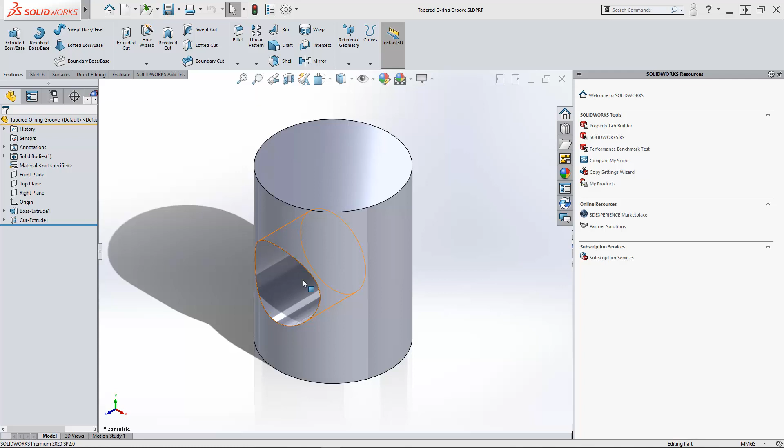I've been challenged to create a tapered groove in the wall of this cylinder. This is to fit an O-ring and keep it captured within that groove. So it's not just a straight slotted hole.

It needed to have a taper so we could press the O-ring through into it and hold it captive. Okay, so we've got a cylinder here with a diameter of 115 millimeters, and a bore that's 67 millimeter diameter. I need to protect the outside of that with an O-ring, because of where this thing will sit.

So first thing I'm going to do is use the swept cut command. The swept cut requires a profile sketch and a path sketch. Even though it asks for the profile first, it's always best to create the path and any guide curves before you even think about drawing your profile. So that's what we're going to do.

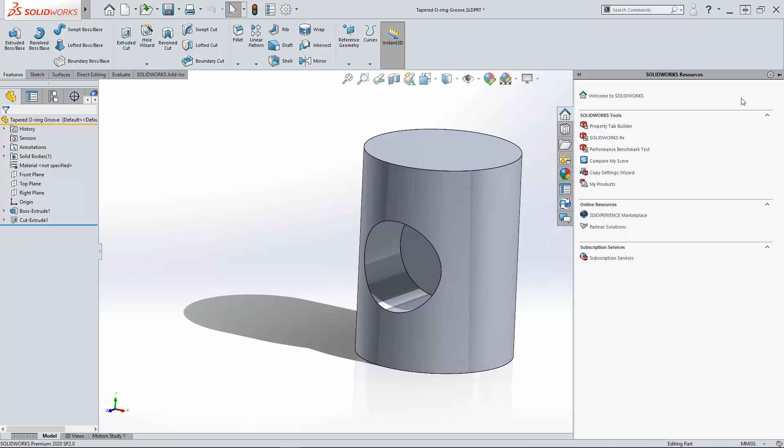So let's just clear that away. Here we have our parts. What we're going to start with is a sketch to help me define the shape of my profile path. I'm going to put a sketch on the front plane here, and draw an ellipse.

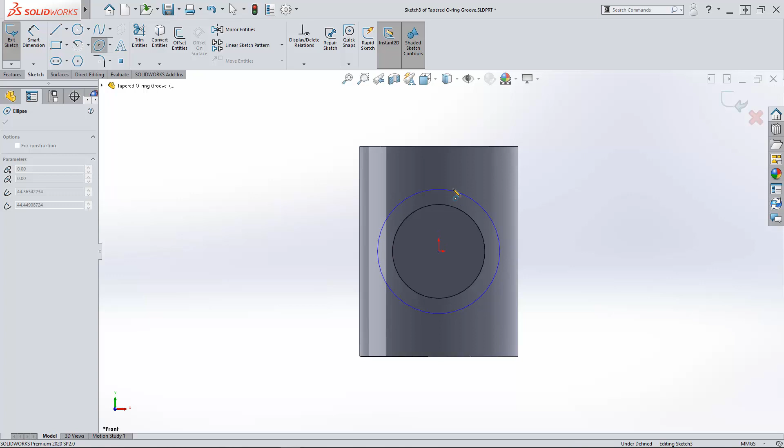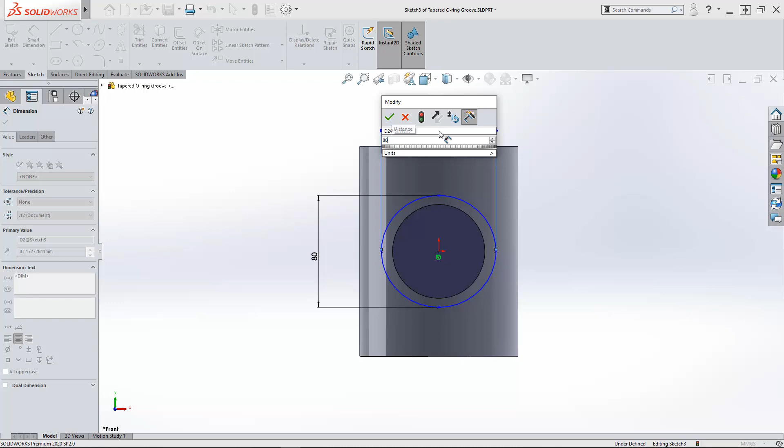Now, it is a circular hole, but I might want to control the overall size of this circle a little more. So I'm going to make it into an ellipse so I can control its width independently of its height. I'll make the height about 80 mil, and for the width, let's try 80 as well, which does make it a circle, but let's go with that.

Now the sketch is still underdefined, because I could still move these control vertices of the ellipse. So I'm going to select two of them and make them vertical to each other in this instance.

This is almost the path I want it to follow, but it needs to be scribed on this surface. Although there is a wrap command that's possible to use, for this we can get away with just using the split line command.

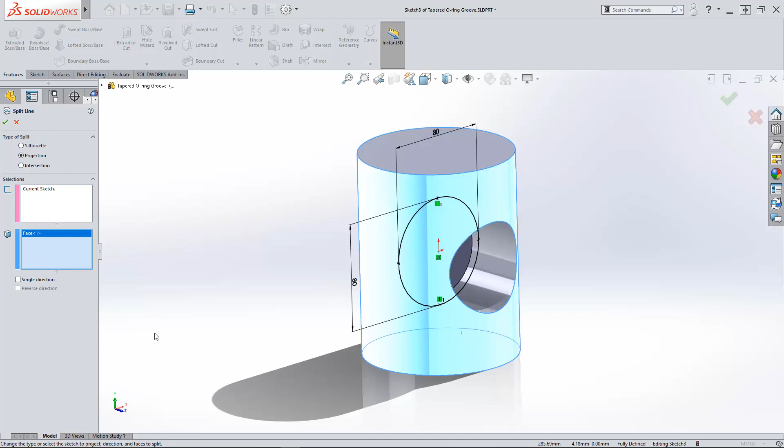So this will project that sketch onto this surface. I'm going to tick single direction so it only affects one side of the cylinder. Now we have a line scribed on the surface.

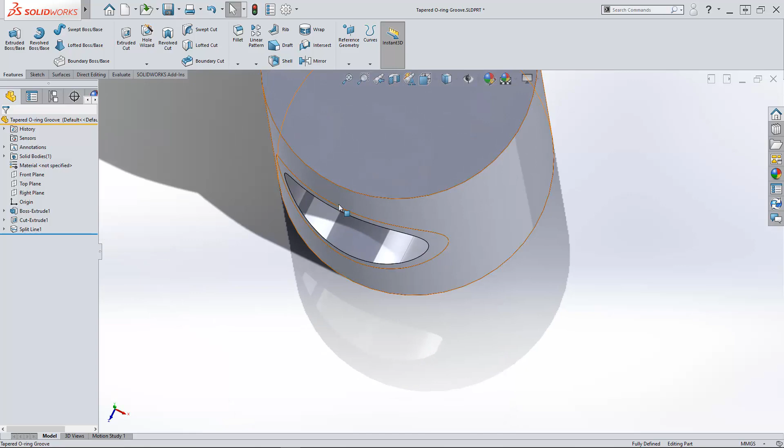That is going to be the center of the opening of my O-ring groove. We're going to create a sketch that's going to follow this path, but as we look around, it can start sort of horizontal, but it's not going to stay square because it has to follow and track round the cylinder.

So the only real way to control that is with guide curves. The ideal guide curve for me here would be something that was normal to the surface at that edge. We've got a command in SOLIDWORKS for that, on the surfaces toolbar.

It's this one here called ruled surface. We can select that and we get a whole bunch of options for what we can do here: taper it to a vector, perpendicular, swept, or we can go normal to surface. So that's what I'm going to do here.

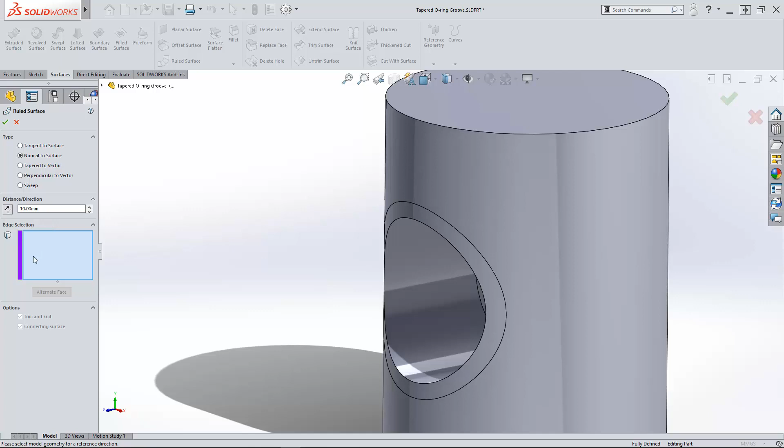The 10 mil distance isn't particularly important, but now what edge am I going to use? I'm going to use this edge here. Let's hit OK.

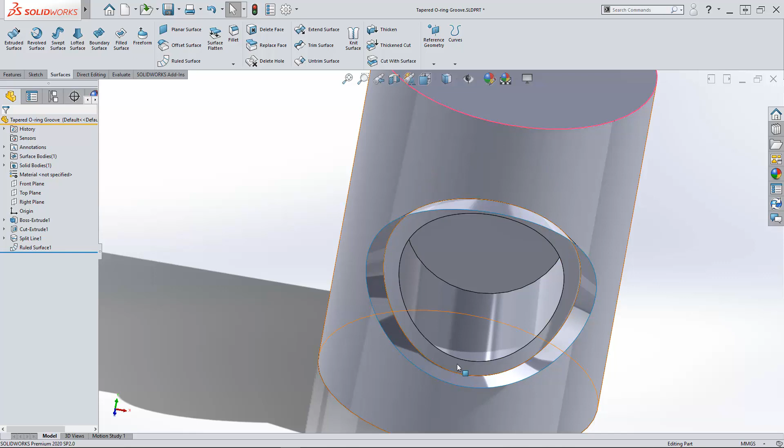Now, if I look at that from the right, we can see that that is going perfectly straight out from the wall of the cylinder at that point. And if I look from the top, we can also see it's going straight out normal to the wall at that point, and indeed it's doing it at all points around that edge. So this is going to be my guide - like the rails on which my sketch is going to sit for this swept cut.

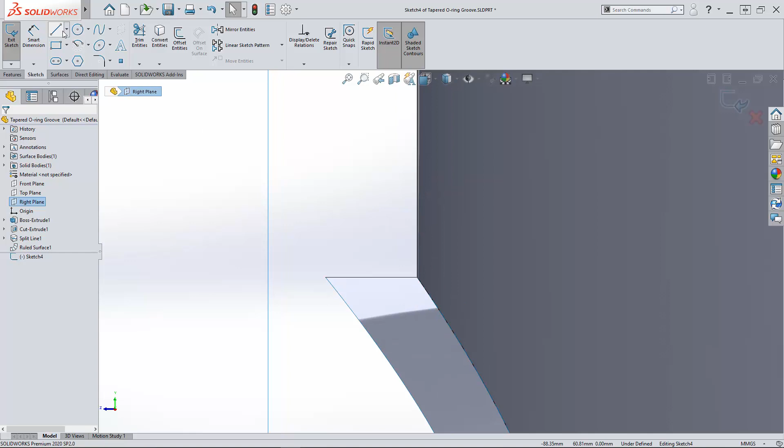So I'm going to draw the profile for my swept cut. We're going to sketch on the right plane, and it's going to be a triangle for this cut, a simple dovetail. So I'm going to draw some lines in here.

Now, purposefully, I am not going to try and make this horizontal or vertical. I'm just going to draw it out like this at an angle, for reasons that will become clear in a moment.

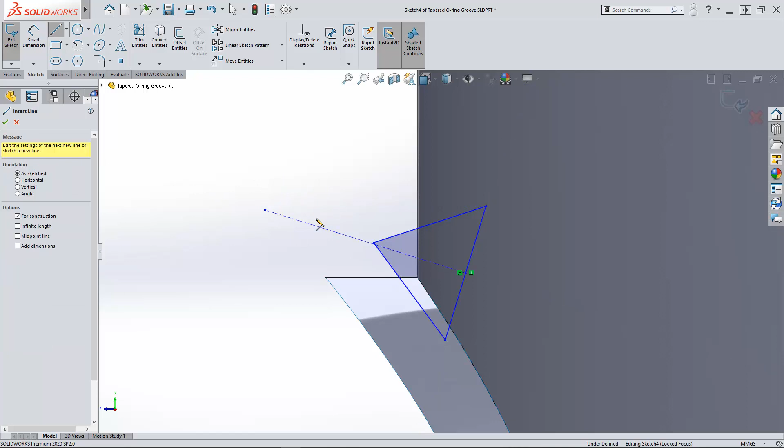So I'm going to draw a construction line out from here, and another one across here. Now, if I hover over that line, it will pick up the perpendicular relation, which is quite nice, and I'm keeping all these things perpendicular to each other. That is going to be the control I have on this particular sketch.

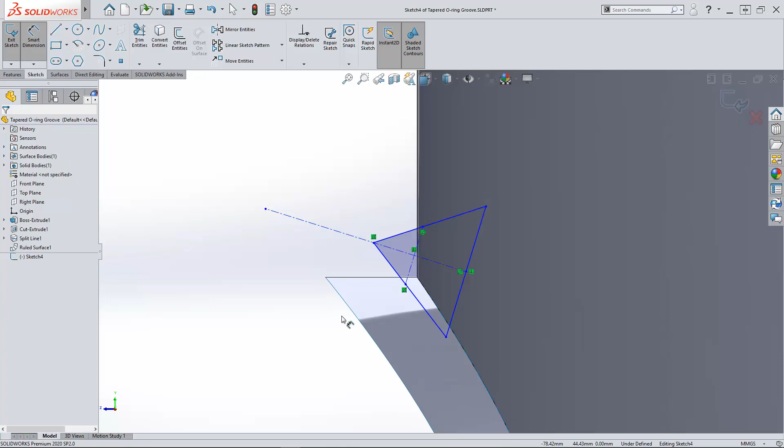So I'm going to select those two, make them coincident as well. I'm going to specify my opening width for this hole - let's say it's about 4.5 mil. The depth of this groove, I'm going to set at 4.5 as well.

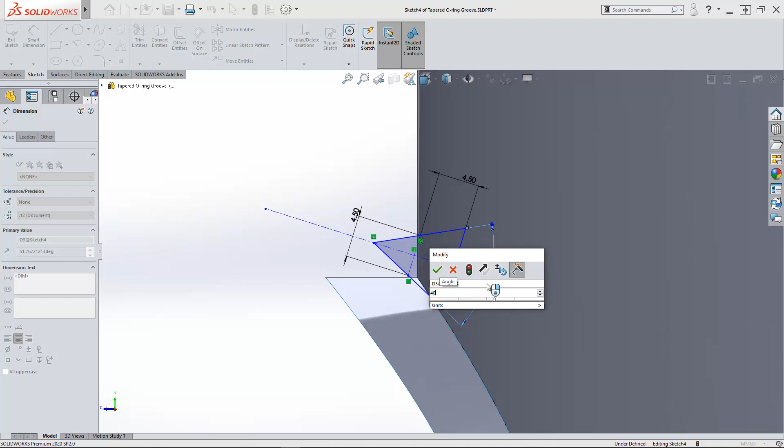And then for the angle, I'll have it fairly shallow. I don't want it too tight. I'm going to make it 40 degrees.

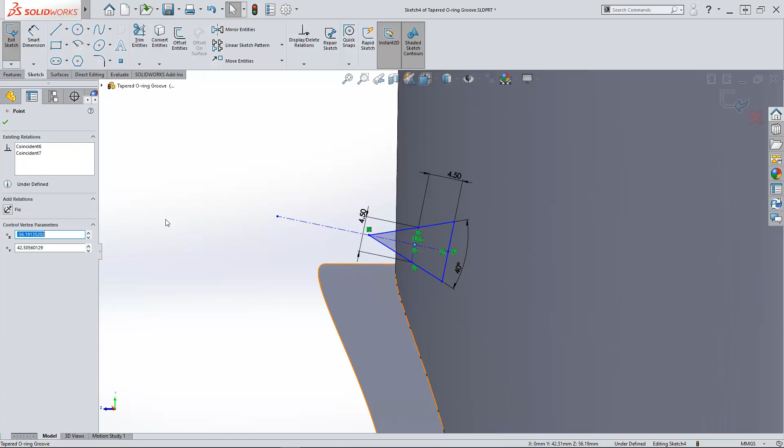Okay, so we have this sketch in here. Now there's one more thing I'm going to do. I'm going to put a little sketch point on this line, then take that line, hold down the control key so I can select the other one, and make them coincident with each other. So I've got a control vertex here, and one at the end of this line that I just extended out, and I didn't give it any sizes because I didn't need to at this point.

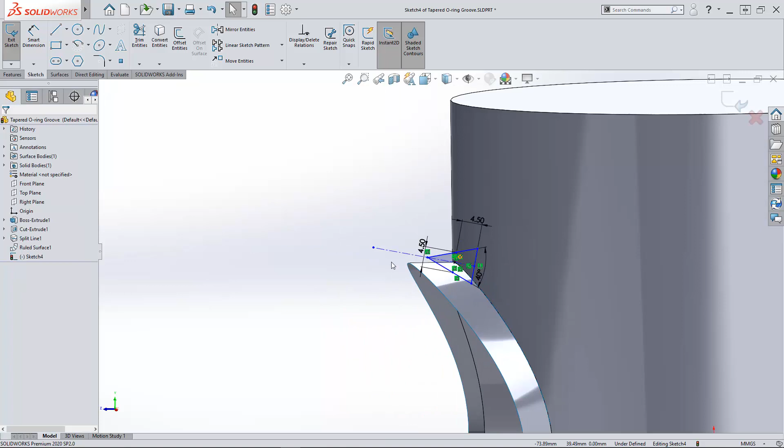Now I need to attach this onto this edge here. If you pick a 3D edge like I've done here, the option you get for a sketch relation is the pierce relation, so it will thread that edge through that point. Now it knows exactly where that part is. And if we take this one, we can do the same for the outer edge of this surface and pierce those two together, and suddenly my sketch is perfectly aligned.

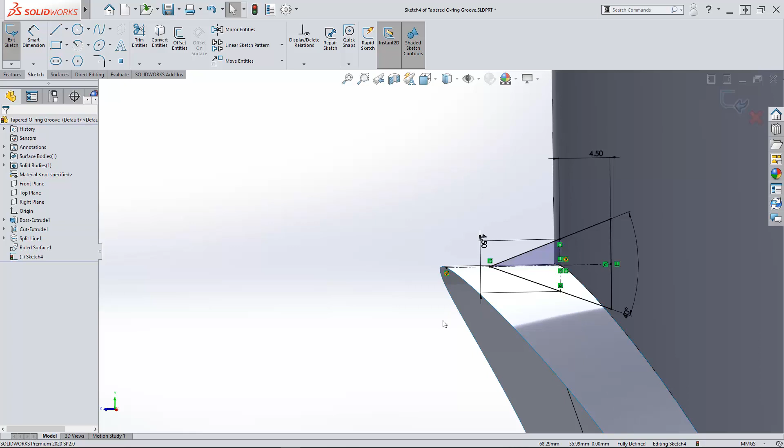Now it has got horizontal and vertical lines to it, but if I'd left them horizontal and vertical, as the sweep progressed around the profile, that horizontalness and verticalness might get defeated in the plan view, because what would be horizontal and vertical wouldn't be in line with my profile, this surface. So that's one of the reasons why we had to make sure we weren't using any vertical or horizontal sketch relations in this little feature here.

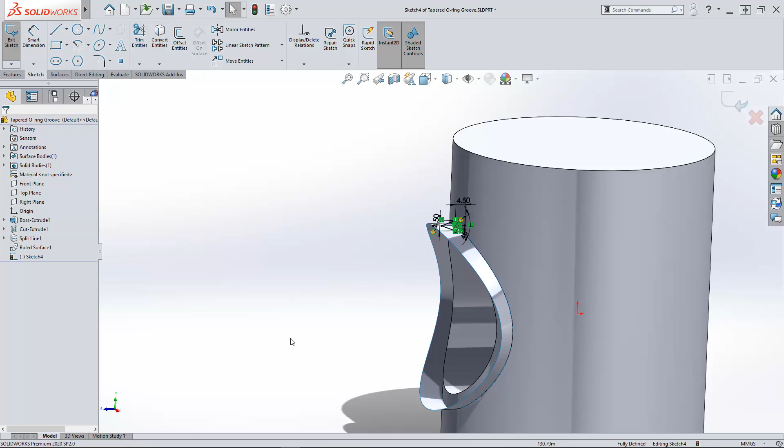Okay, so I now have an edge that I can use for a path. I've got an edge for a guide curve, and I have a profile. So I'm good to go, ready to do my swept cut.

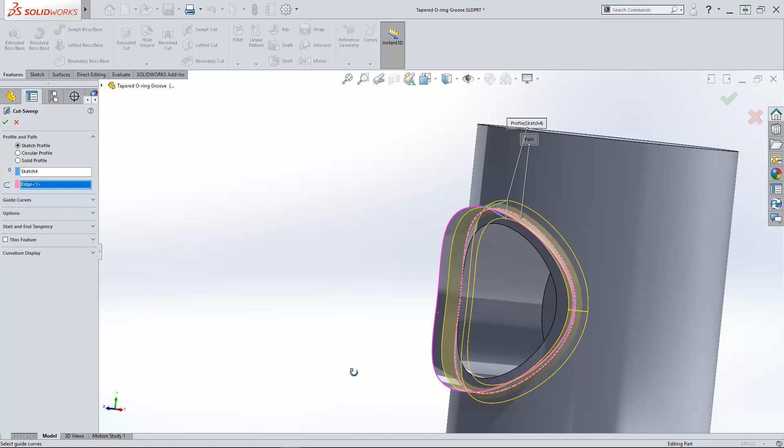Okay, so we have our swept cut here. The first thing it asks for is the profile, then we can select the path. If we hover around here, you can see the tip of this profile isn't really capturing the edge of that surface - it doesn't quite follow the curvature perfectly.

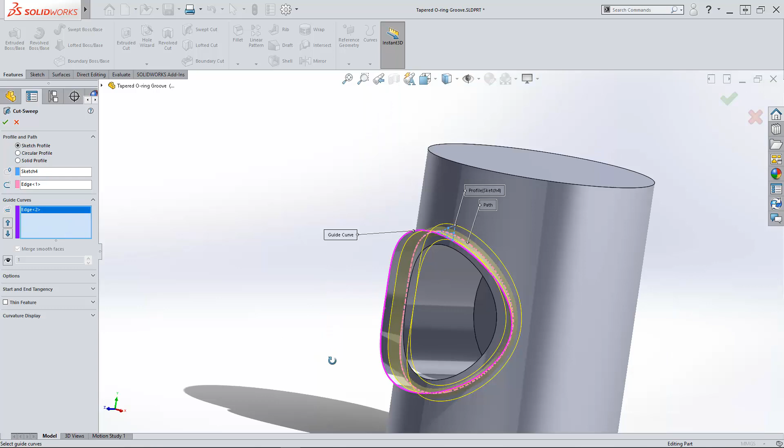So this is where the guide curve comes in. If I go to the guide curve and select that outer edge, we'll now see it squaring up, and the tip of that triangle is following that surface as we move around there. Hopefully you can see what's going on. So we can cut into the part, and we have our cut.

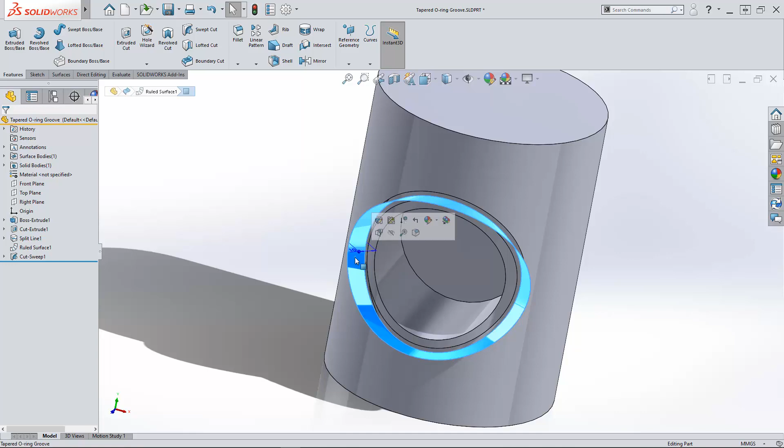Okay, a little bit of tidying up I quite like to do here. If we take this surface body, we have an option to delete it. The direct editing tab will help us here, so we can either delete or keep bodies. I'm just going to delete that one, just so I'm not distracted by it. So we've just got one solid body in this part.

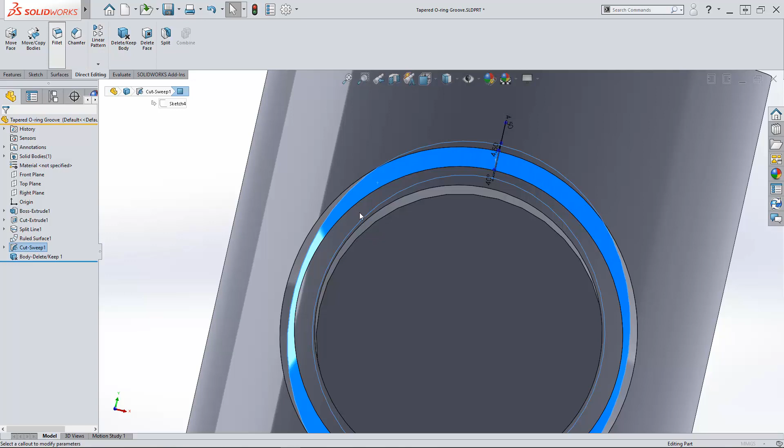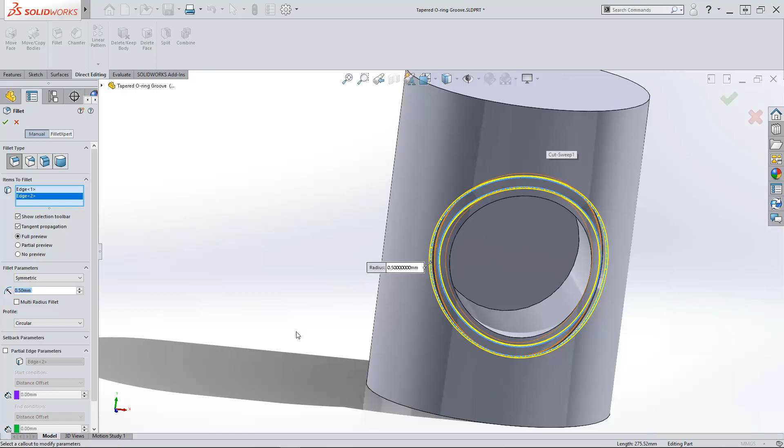A little final flourish perhaps would be to add in some fillets on this face. Let's make it, say, half mil fillet in there. And also on the front edge, I might want to add some fillets as well - we can try half mil. I'm keeping them as separate features because I can always refine that path later on.

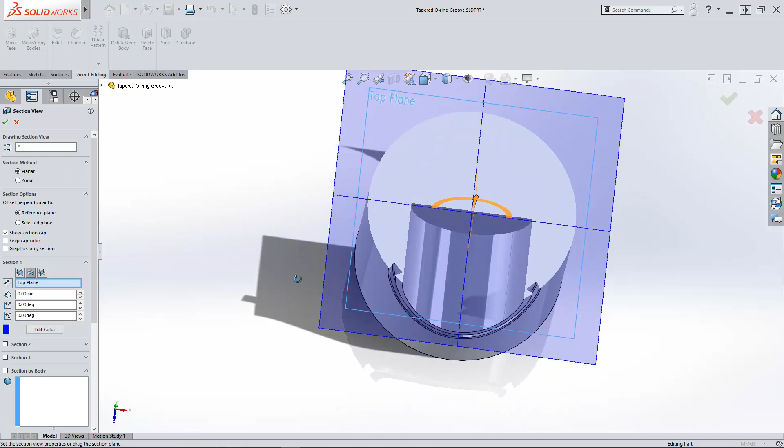And here is my tapered O-ring groove that appears as if it is maintaining this sort of normal relationship, this perpendicular relationship with the outer surface. Now, one way of double checking that would be just to hit the top plane there, do a section view, and you can see the effect of that O-ring groove.

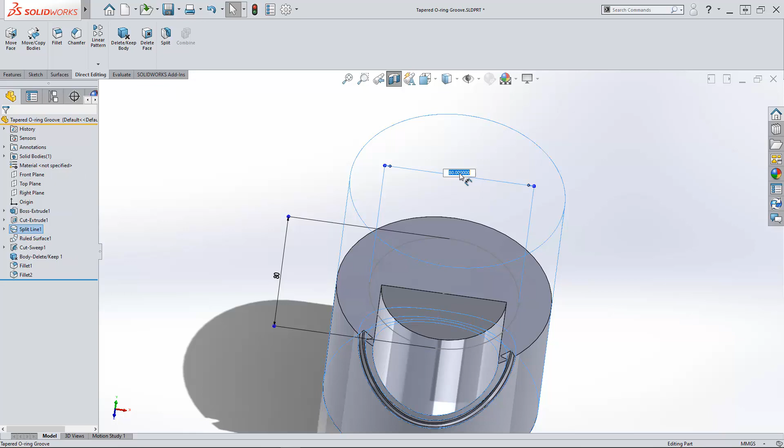Now, depending on the application we're looking at here, this is the smallest that wall thickness will get. And if we are concerned about that, then perhaps you need to consider our original split line feature that we had. So instead of 80 degrees, we might decide that perhaps 85 is the size we want to maintain enough solid geometry in there.

It's obviously lengthening the O-ring groove, so you have to make sure it is long enough to fit in there, but that's what you may need to do.

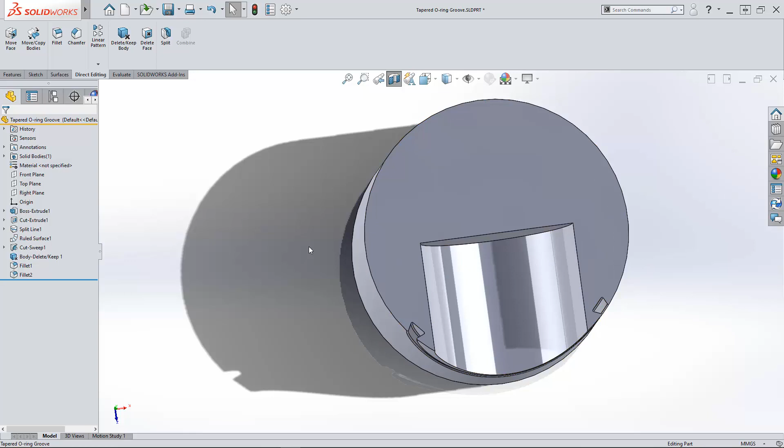Okay, if the groove becomes so large it's getting near the 180 degrees of arc that we're having to follow, then we might have to go down a slightly different route with the wrap feature, where we can get a sketch and allow it to get wrapped around a surface. But I think for this, we'll be okay.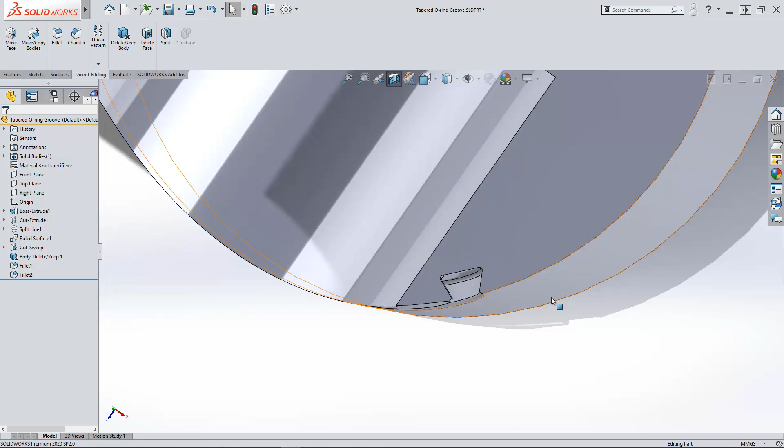So that's it. That's the basic instruction of how to create that tapered O-ring groove, but maintain that perpendicular, normal relationship with the outer cylindrical shape. One, two, three, four features - it was always going to be more than one, but hopefully not too tricky.

Okay, so that was an interesting challenge of the day, to look at how we could create that tapered O-ring groove. So hopefully you can follow along.